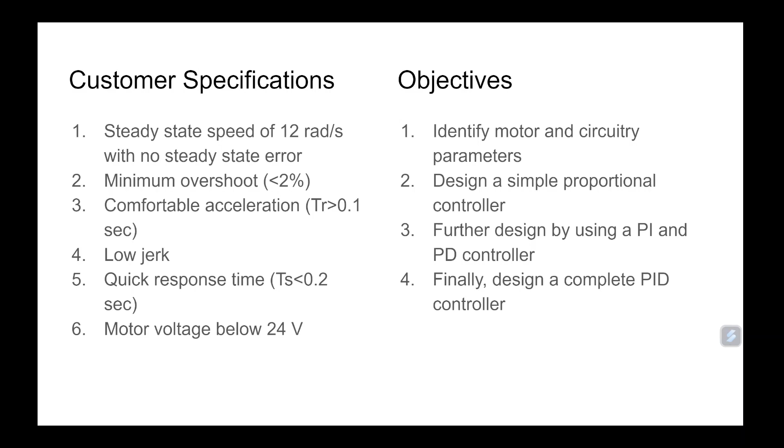There needs to be a low jerk from the voltage readings, and there needs to be a quick response time less than 0.2 seconds. The motor voltage needs to stay under 24 volts. And these are just some minor specifications to the designing of the controller. Our objectives are to identify the motor and the circuitry parameters, design a simple proportional controller, further design by using a PI and a PD controller, and finally design a complete PID controller. That's kind of what we went through and did throughout the projects.

Here we go again, going through the lab processes that we went through with designing this controller. We start off by understanding the mechanical side of this type of project. We had a disk with a sensor that read the radians. We idealized that the sensor was accurate. Then we also went into the controllers or the Arduino board and the voltage box and seeing how everything kind of connected and everything worked together before we actually started going in through controller design.

We had to mathematically model and set up the wiring for the Arduino boards. So we did understand how this whole system worked before we jumped in. We tested things as far as voltage to velocity, making our equations for our plant. And then once we found all that, we started making controllers. We made a proportional controller, PD controller, a PI controller, and then lastly a PID controller.

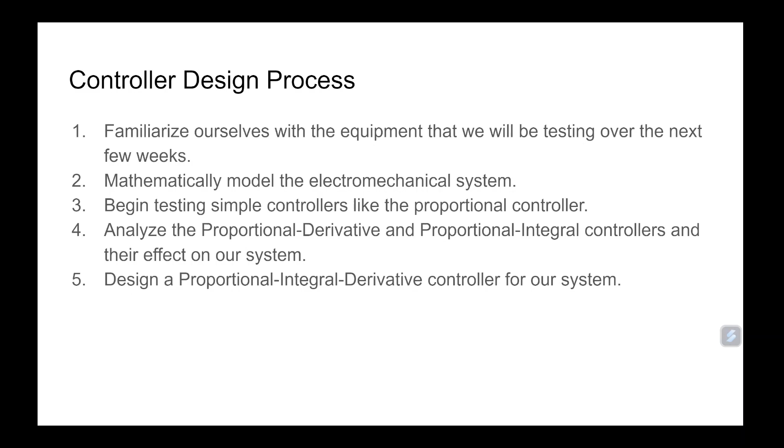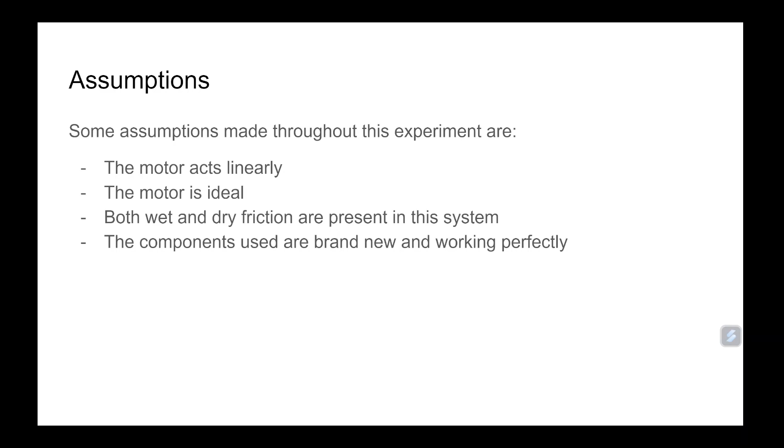We saw throughout each experiment the different capabilities of each controller and what it limited to us. So what we came to in the very last lab is that the PID controller is the best for this project, and you'll see why here in a second. We're idealizing that the motor is linear, the motor is ideal, both wet and dry friction are present in the system, and the components used are brand new and are working correctly.

So what we started off doing within this project, we used SISO tool to theoretically find the best values for this PID controller to model it. As you can see on the right-hand side, the step response from R to Y is our response to our input and output. It does reach a steady state value of 12 radians per second. We tried to keep it within the parameters of a rise time of greater than 0.1 and a settling time of less than 0.2. It's not quite perfect, but it is close enough for what we tried to design.

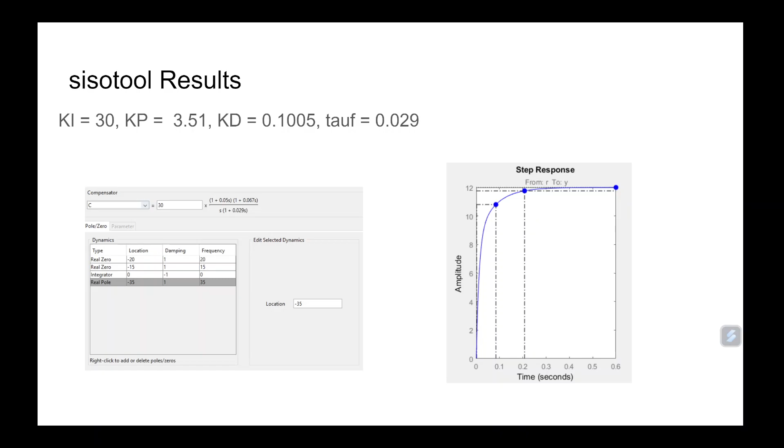For this kind of controller, there are multiple other types of controllers that could be used, for example, a PI controller. It just depends on how you set up your pre-filter and whatnot. But yeah, there are other designs that also work within these parameters. So going into it, using those parameters from SISO tool, we used them in an actual real experiment, in the Arduino code, ran the wheel and saw the theoretical values versus the experimental values that were produced.

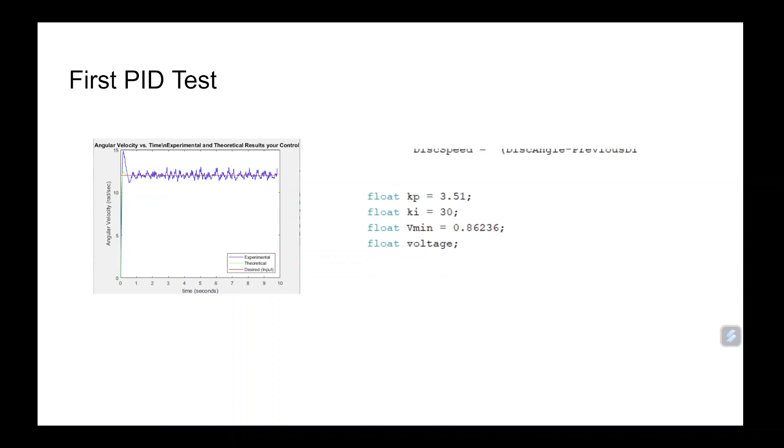As you can see in these first values, we had a large overshoot with a lot of oscillation. So what we ended up doing was first starting by decreasing the Ki value significantly. This is from the integral value from the Ki over s. As you can see, this produced a large undershoot that was very slowly coming up to the 12 radians per

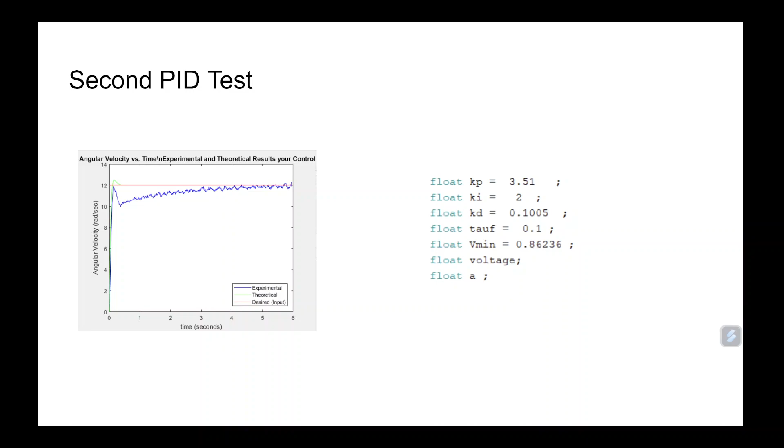second that we wanted. So as you can see, we had 3.51 and 2. What we ended up doing was just increasing the Ki again just a little bit, just to see what is the right value for us to use for Ki. As you can see, our undershoot was still a little low, but we actually ended up coming up to the line a lot quicker than previously, so we ended up staying with that value.

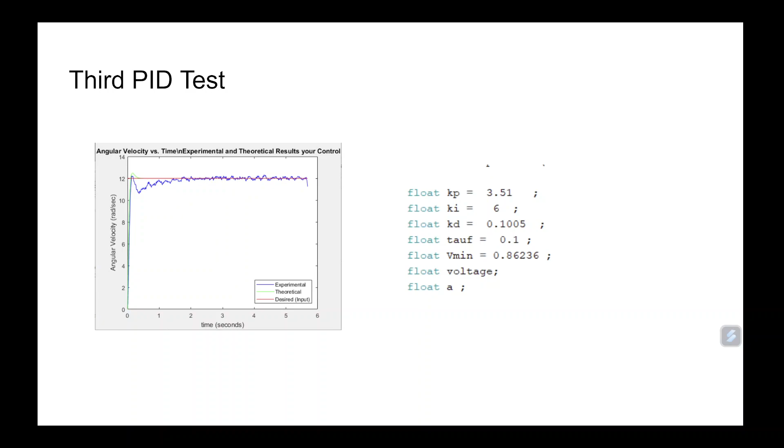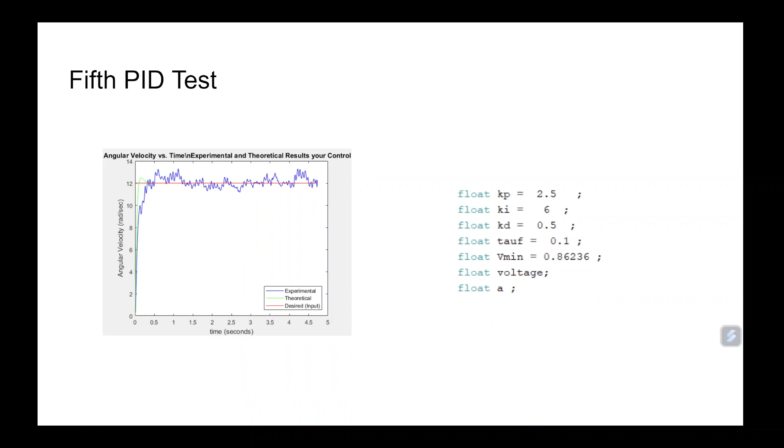Now what we ended up doing was changing our KD value to 0.5, which we thought was going to reduce the undershoot and make it more on the line. What it ended up doing was actually doing that, but also increasing the oscillations. So what we did next was try and decrease KP, our proportional gain, and that sort of worked. It didn't really work too well. It made it oscillate a little more.

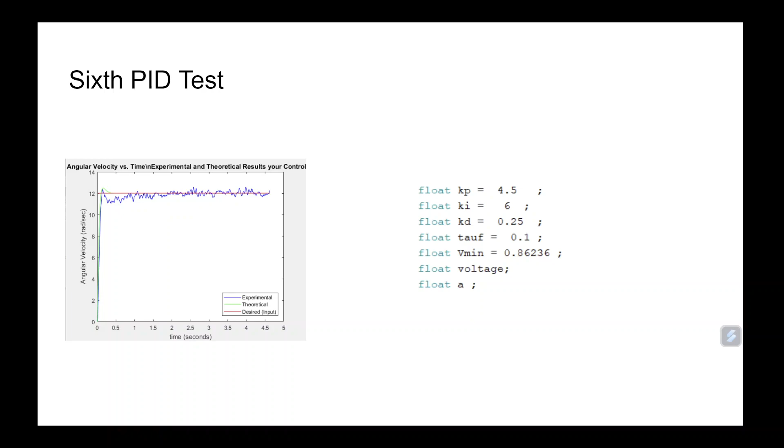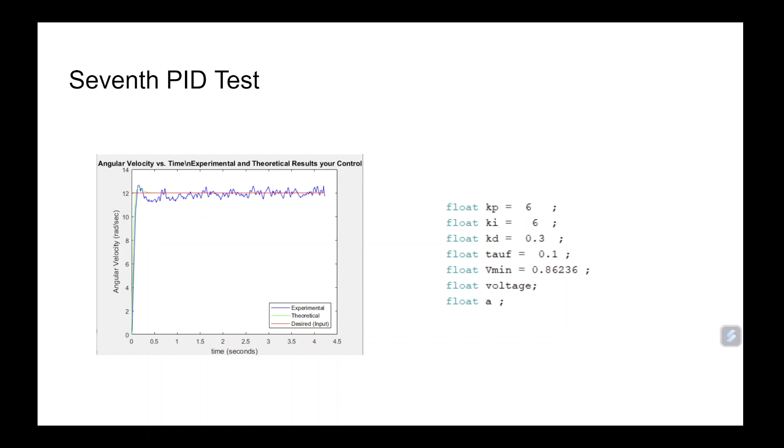what we previously had. So what we did next was increase KP again and increase KD just a little bit to see if we could tweak some things. We got a little bit better results. The undershoot was less, but the oscillations were a little greater. So now what we ended up doing was just going back to the old KD value and decreasing our KP.

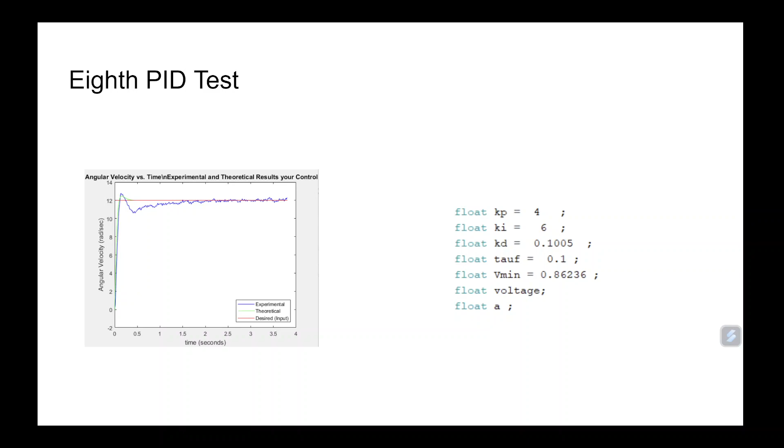And what we ended up getting was actually a lot better as far as oscillations along the 12 radians per second desired output, but our overshoot and undershoot was still great. So what we ended up doing was decreasing our KP value, which increased our undershoot drastically. But we do eventually get to the 12 radians per second, and actually a lot quicker than what we previously saw in our third attempt for the PID controller.

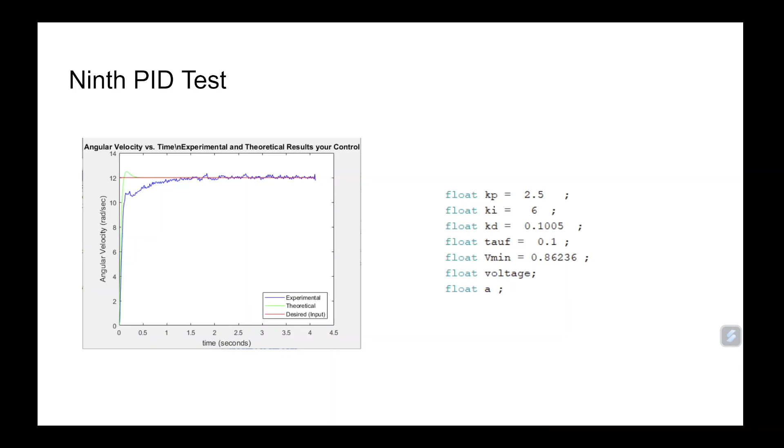applied to. It all depends on the specifications that are required and what is being transferred, as far as from voltage to velocity or acceleration or radians per second, how the plant's designed, how the sensor is designed, and what is necessarily needed in the controller to meet outcomes, like steady state error equals 0, or is at a percentage less than or greater than something. These are all just specifications, but controllers can be designed around what we have been doing in our previous labs.